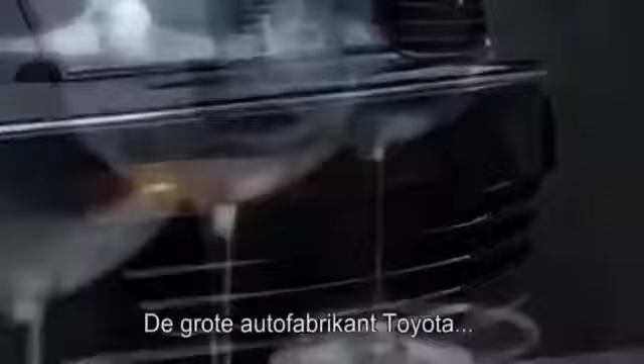Lexus is just over 20 years old. The world's largest car maker, Toyota, created the brand to compete with other high-flying luxury marques, Mercedes-Benz, BMW, and Jaguar. It's worked. Lexus is now one of the biggest-selling high-end marques in the United States. But now, Lexus is out to inject more excitement into their brand. Chief Engineer Tanahashi Haruhiko is the man behind this vision.

The LFA has a passion, an emotion that isn't in earlier Lexus cars. We wanted to move the brand in that direction. That's how we made this car. Tanahashi believes the marque can mean more than just luxury. I wanted to make a new sports car, one that could stand against the long-established European so-called supercars, Porsche, Ferrari, and Lamborghini, to show that we Japanese could make something like that.

It's a risk. The company hasn't made anything like this before. Their reputation depends on its success. Chief Engineer Tanahashi is stepping into the unknown. He must build a car, a team, and a factory from scratch. Basically, we proceeded at my discretion. And where there weren't any rails, I laid them down.

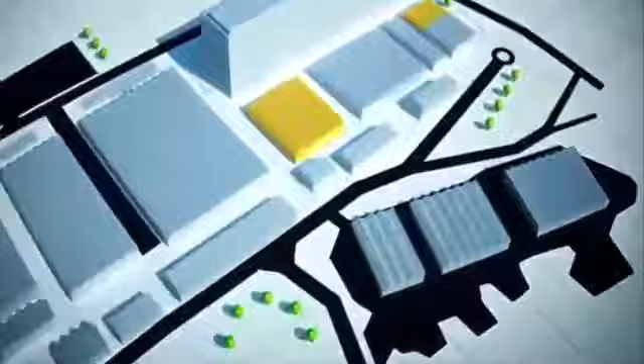Finding a factory in Japan isn't hard when you're part of the country's largest company. Toyota is so big, they even have their own city, Toyota City. Of the company's 15 Japanese factories, 10 are found in the city or close by. Among them, the Motomachi assembly plant. The company transformed two unassuming blocks of this megafactory to create the LFA. They then scoured Toyota's 50,000 Japanese workforce to handpick just 175.

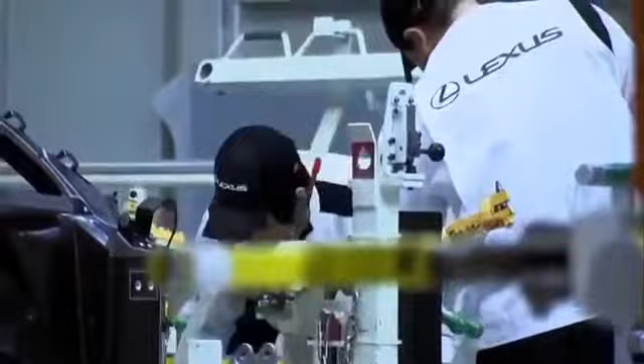All the associates here at the LFA Works feel they are artisans, not just operators. These artisans are known as takumi, Japanese for craftsmen, a status only conferred on the most highly trained, skilled workers. Each and every associate at the LFA Works is seeking to achieve perfection, taking this challenge on with a sort of samurai spirit.

Yamanaka Shigeru is manager of the LFA Works. His teamwork credentials come from another time-honored Japanese tradition, baseball. Before this, I was working as manager of the Toyota Motor Corporation baseball team, which brought people together from lots of different... It was because I could manage that organization that I was made manager here.

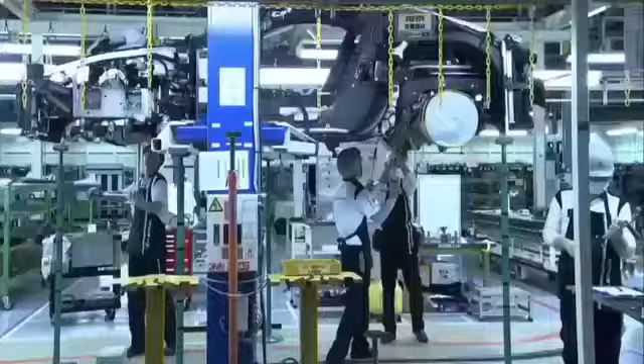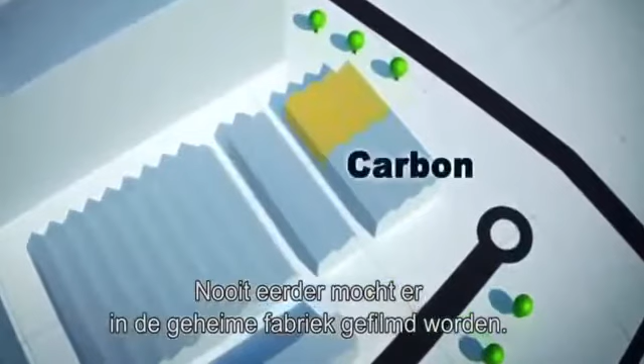To reach their goal, the tight-knit team utilize sophisticated tools and materials to build the car. The most important of these is carbon fiber composite. Carbon is crucial to the car's performance. It's a material 5 times the strength of steel, yet a quarter the weight. It's the construction material of choice for both Formula One racing cars and the aerospace industry. The company even make their own carbon fiber here on site. Up until now, no television cameras have ever been allowed inside this top-secret facility.

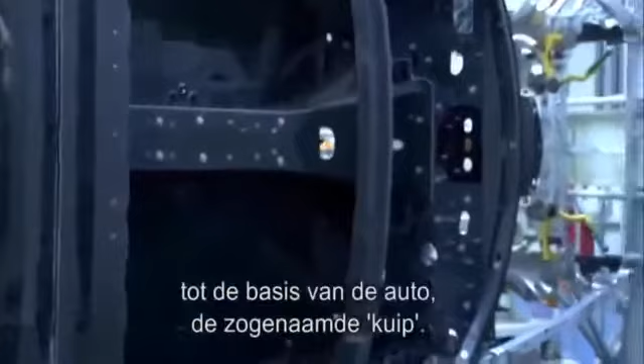First, simple strands of carbon fiber are woven into a pliable cloth using an automated weaving machine. This fabric is then transformed through heat, pressure, polycarbonate resin, and labor-intensive techniques into the car's core known as the tub. The tub is pieced together like a 3D jigsaw. It starts with the construction of the floor. To make it, precisely cut carbon fiber cloth is lifted onto a mold. Next, skilled takumi smooth the supple fabric over the mold. This one is for the transmission tunnel that will house the drive shaft and exhaust.

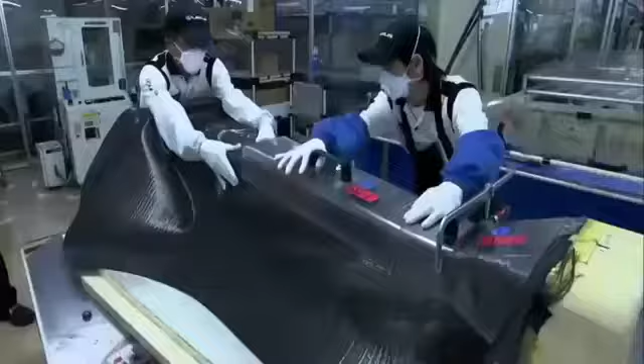In very complex areas like this, the fabric inevitably becomes frayed and not very neat. The associates work with these areas as if working with silk, taking great care every day. They also wear masks to avoid breathing in the hazardous fibers. In the beginning, the associates found it very difficult to work this material. It was much easier when they used an iron.

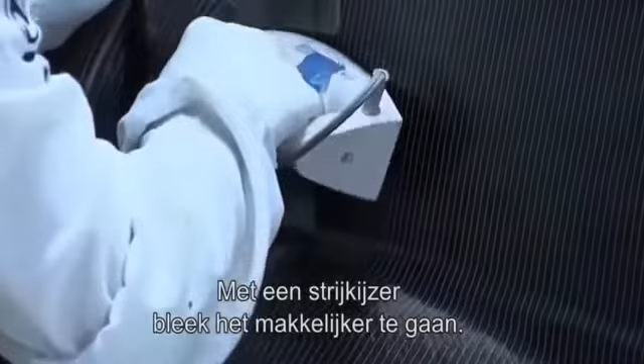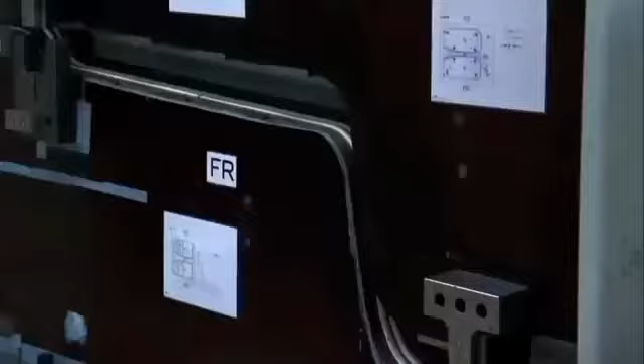The completed part is iron heated to set its shape. It's then fitted into a template, along with 7 other floor parts, and inserted into a 1,000-ton press. A glue-like resin is pumped into the template, and the whole section is then baked for 8 hours at 130 degrees Celsius. Under this pressure and heat, the resin sets hard, binding the individual parts together to produce the car's floor panel.

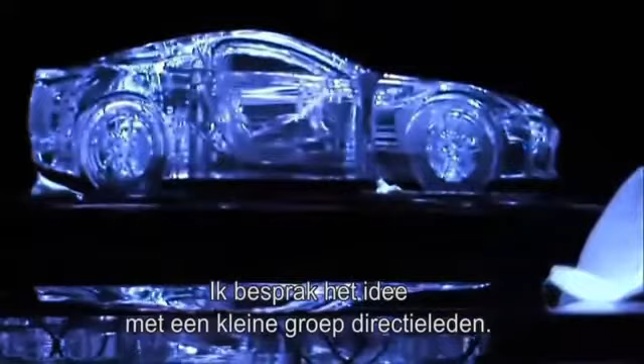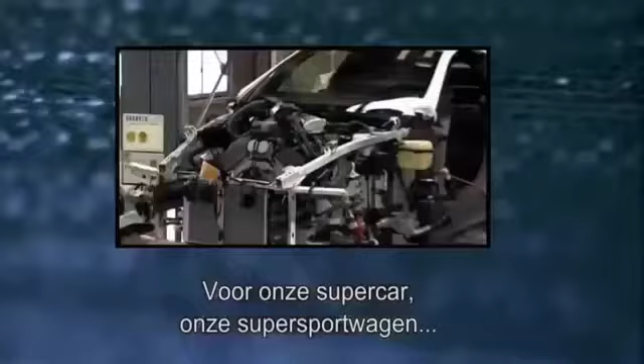Back in 2000, the concept of a world-beating supercar only exists in one man's head. At the company, I talked to just a small group of people at the top, not expecting anything, and they said, go ahead and try. With permission to proceed, Tanahashi gathers a team of engineers around him, and they start to make the basic engineering decisions. In the beginning, we planned to make the body from aluminium. But Tanahashi is fascinated with the possibilities offered by carbon. Developing a supercar, a super sports car, carbon fiber was a material I really wanted to try using, if at all possible.

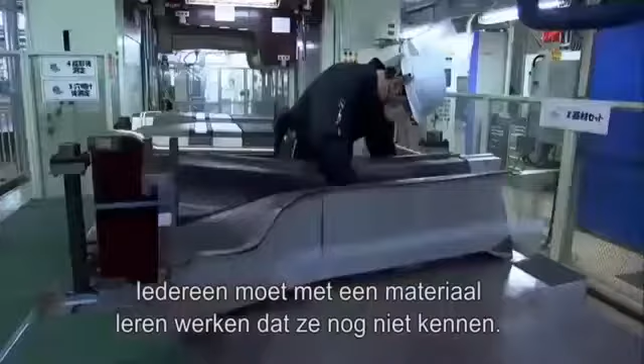But this wonder material has its drawbacks. It's expensive, and the company has never used it to build any of their cars before. Despite these significant challenges, Tanahashi gets his way. In 2005, my boss said, why not go for carbon? Slapping me on the shoulder. And I made the decision to go for carbon then. It's a bold step. Everyone involved with this project must master a material they have no experience with at all. It was the first time the workers had touched carbon, and everything about it was difficult for the workers.

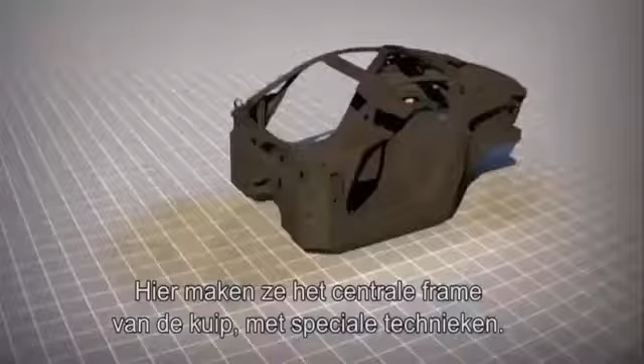In the state-of-the-art carbon fiber facility, the Takumi are returning from lunch. They vacuum themselves down to remove any foreign particles before entering a highly confidential sealed room. Here, the majority of the tub's central frame is created using the most intricate techniques. In this process, an automated laser cuts out hundreds of individual shapes from carbon fiber cloth that's been pre-impregnated with a sticky resin.

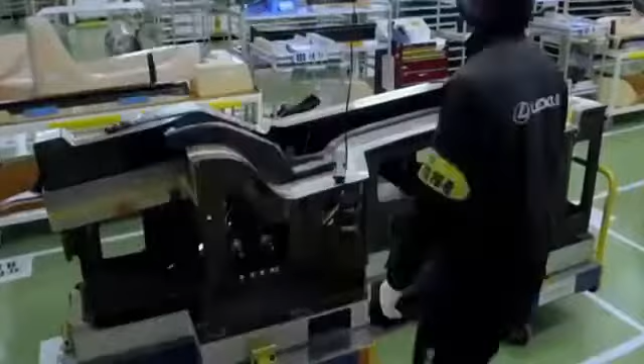Next, Takumi layer the cutouts, up to 20 sheets deep, onto a mold. This one will make the right side panel. The associate uses a dryer to raise the temperature of the laminate and half melts the resin as he applies it. The tacky cutouts stick to each other and any gaps are squeezed out using a vacuum bag that forces them together.

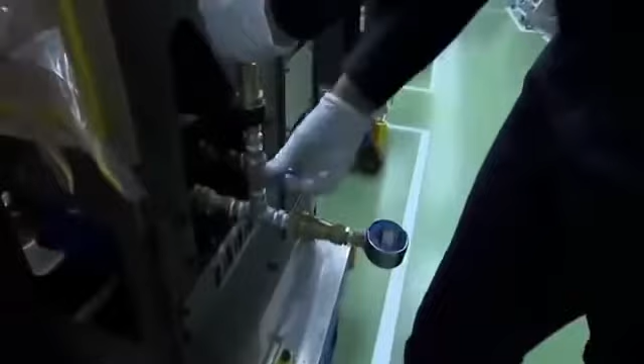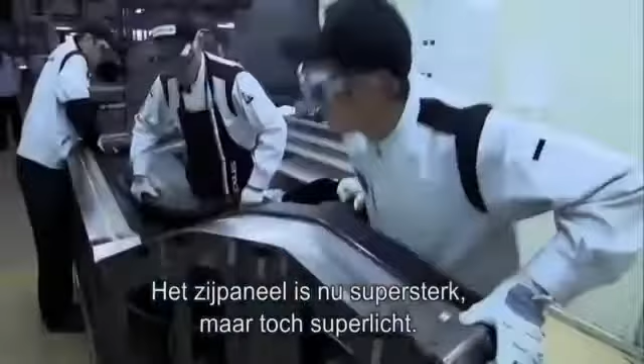The shrink-wrapped side panel is then wheeled across the works and loaded into a pressurized oven. Baking overnight at 150 degrees Celsius sets the resin, resulting in a side panel that's both ultra-strong and ultra-light. An aluminium equivalent would be twice as heavy. Weight saving is the holy grail for all auto engineers.

Less weight and more power leads to increased acceleration, and speed defines a supercar. The body of the LFA is 65% carbon fiber, helping it accelerate from 0 to 100 kilometers per hour in 3.7 seconds. If made of aluminium, it would be 100 kilograms heavier, like having a sumo wrestler in the passenger seat. As it is, this car weighs just 1,400 kilograms all in.

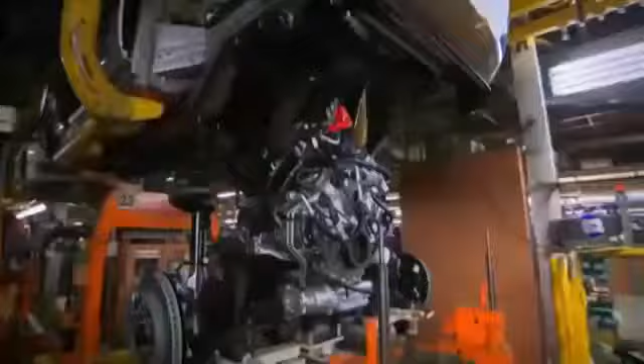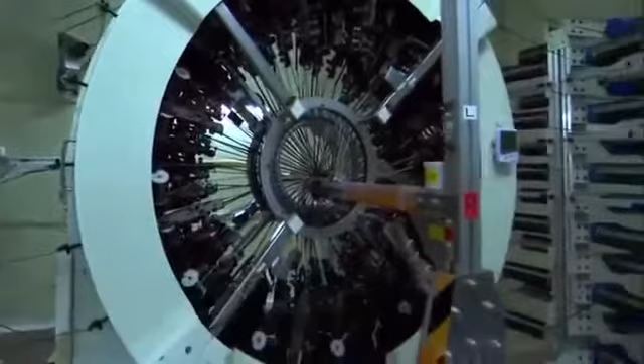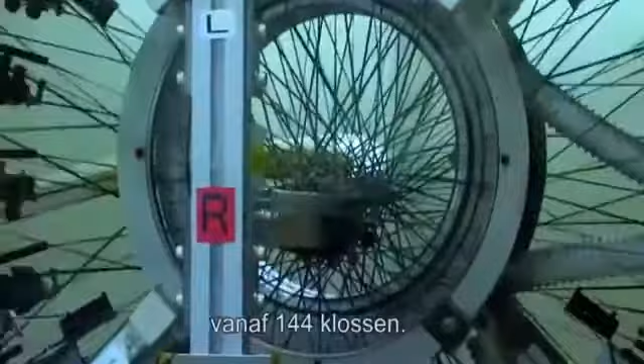Back at the factory, in a locked room, a bespoke machine creates two crucial parts to complete the tub's construction. The roof rails support the windscreen, as well as protecting the driver if the car rolls over. This custom-built circular loom weaves the carbon rail in 3D. It uses lasers to control the feed of carbon fiber strands from 144 bobbins.

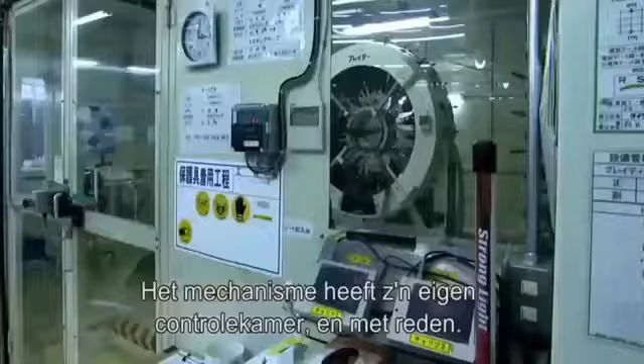These knit the carbon around a top-secret automated template that's fed through the center of the loom. This is done twice over to cross-hatch the carbon weave, so giving the rail its strength. The whole mechanism has its own control room, and for good reason. If something goes wrong, even a little thing, the shape gets distorted immediately, so the operator constantly pays attention to avoid this.

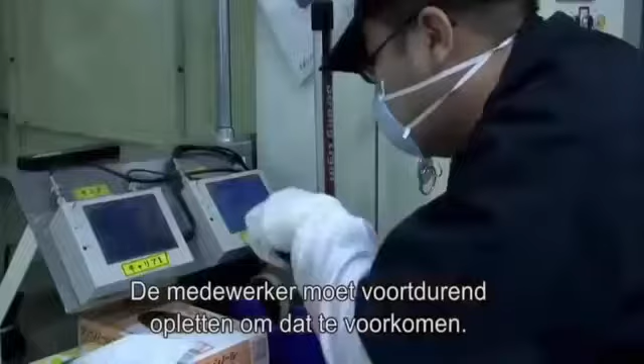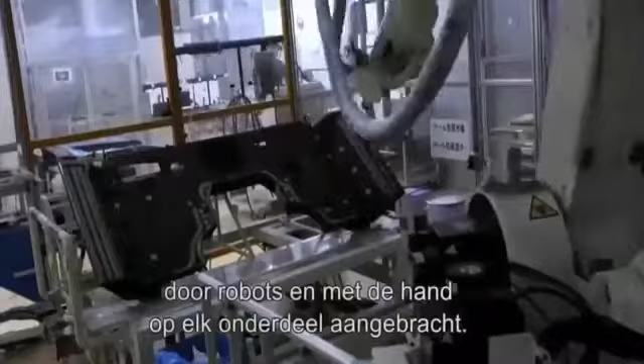The roof rail is heated and impregnated with more resin to complete its metamorphosis from a flexible tube to a rock-hard rail. You may think that this is quite heavy, but it is only 2 kilograms. The tub is bonded in another top-secret jig. First, a super-strong adhesive, known as epoxy resin, is applied by robot and hand to each of the parts. The separate parts are transferred to the jig and locked in place. Pop rivets keep the pieces aligned.

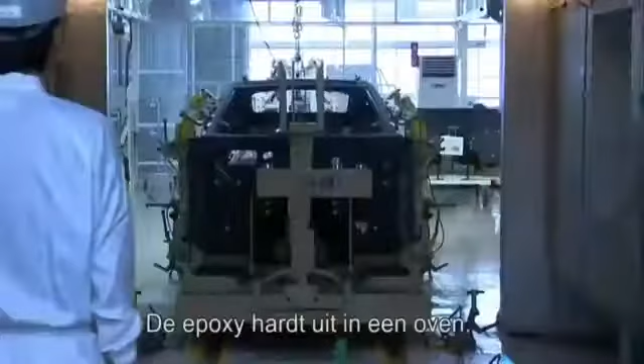To cure the epoxy, the jig is pushed into an oven and then baked for 60 minutes at 60 degrees Celsius. The resulting tub is so strong, it acts as both the structural core of the car and as a crush-resistant safety cell, should the car crash.

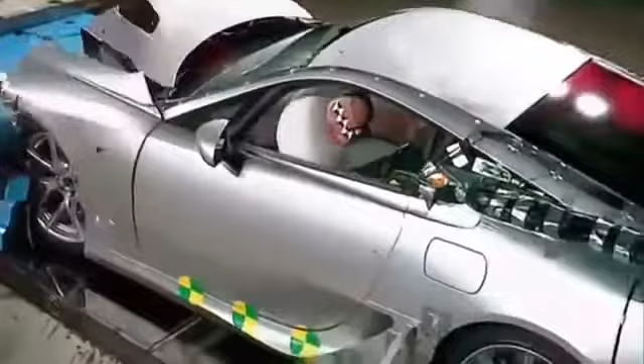The challenge now is for Matsumoto Kengo, chief designer of the LFA, to create a car with a body as technical as it is elegant. For us, aerodynamics, heat and airflow management should be tangible in the design. A conventional car cools its engine with forward-mounted radiators that suck cold air through a front grille. Not the LFA. Front space is at a premium, so coolant is pumped from the hot engine to twin radiators mounted behind the car's rear wheels.

Matsumoto had to shape the car to funnel cold air to these vital components. Airflow management is optimally controlled by setting the angle between the door mirror and the cabin. It goes past the cabin and smoothly into the air intake for the rear radiator. This shape is not just for styling. The intake is deliberately formed here, from the base of the glass. The result is an airflow system capable of cooling the engine even under the most extreme race conditions.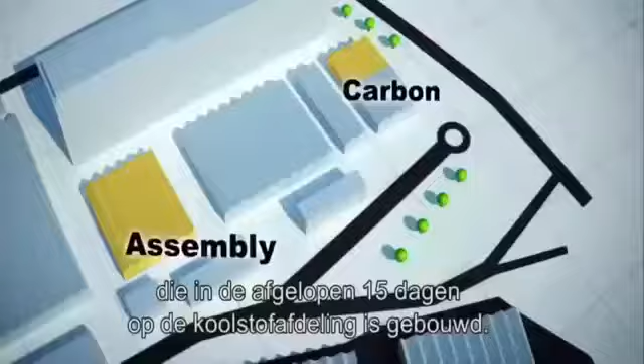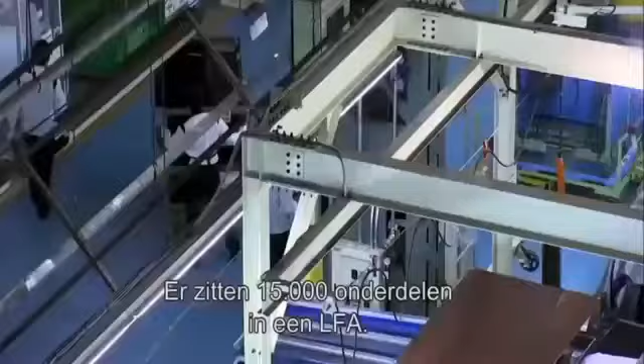It's 8:45 in the morning at the LFA works. The Takumi are warming up for an 8-hour shift ahead. Their first task is to greet the bare cabin as it arrives from its 15-day build in carbon round the corner. In assembly, the cabin will progress through 4 positions: trim, chassis, final, and alignment. 15,000 parts go into making an LFA. The first of these are attached here in trim.

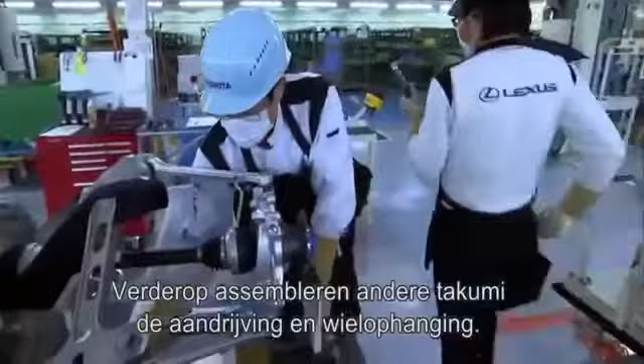Just meters away, other Takumi assemble the drivetrain and suspension. The drivetrain comprises the transmission, torque tube, and last but not least, a 4.8-litre V10. The location of this engine is crucial to the car's entire concept. I wanted to build the car around the people in it. And for a supercar that puts people first, the optimum place for the engine is front mid.

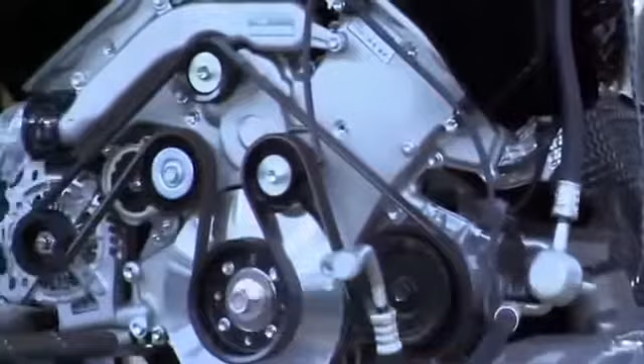This front mid location puts the engine between the driver and the car's front wheels. With the transmission placed at the rear, the driver is in the center and the car feels balanced to drive. The aim is to make the car's handling as good as possible. But a front mid configuration dramatically restricts the space available for the engine. Tanahashi has a problem.

You need an engine of a certain size with a certain degree of compactness, but you want a high-powered engine as well. Tanahashi needs a small engine to fit in the restricted engine space, but he also needs the power of a large engine because power equals speed. And that isn't all. The high-pitched sound of Formula One makes you shiver, doesn't it? I really wanted to have that as part of the LFA.

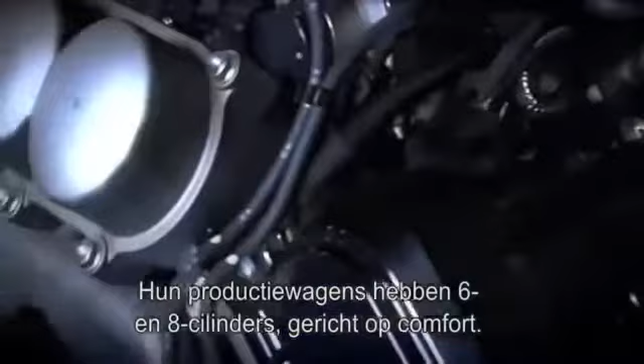Only a high-revving V10 engine supplies this combination of power and sound, but a traditional V10 is too big for his mid-front configuration. Lexus have made nothing like this before. Their production line cars use 6- and 8-cylinder engines engineered for a super quiet ride. This V10 will be the opposite. Tanahashi turns to some old friends for help.

We are a motorcycle manufacturer. We understand power alone is not enough in a vehicle. For a sports car, small and lightweight is critical. For almost half a century, Yamaha have worked with Toyota to create high-powered, lightweight engines and cars. The legendary 2000 GT, star of the James Bond film You Only Live Twice, and Japan's first true sports car, was the first fruit of their collaboration.

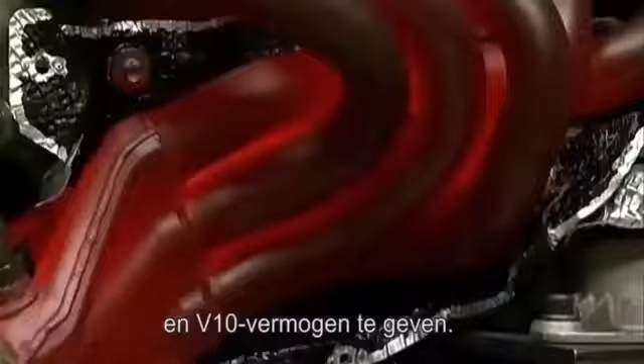Headed by Lexus engine guru Okamoto Takamitsu, the team sets itself an ambitious goal: to create a naturally aspirated V10 engine as compact as a traditional Lexus V8 with the weight of a V6. I wanted to create something different to any other supercar engine. Normally, engineers use turbochargers to boost the output of smaller engines to simulate V10 power. But turbocharged engines don't have the rapid response, acceleration or sound of a naturally aspirated V10.

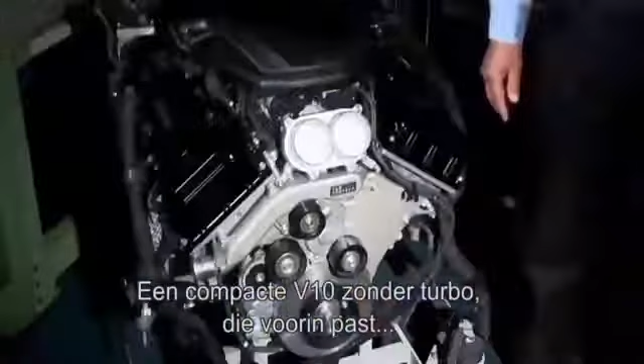By using Yamaha's motorcycle know-how, the lightest metals, and redesigning the engine's guts, Okamoto creates a masterpiece of engineering. A non-turbocharged compact V10 that fits into a mid-front design while keeping weight to a minimum. The engine starts life in Toyota's Miyoshi plant as molten aluminium.

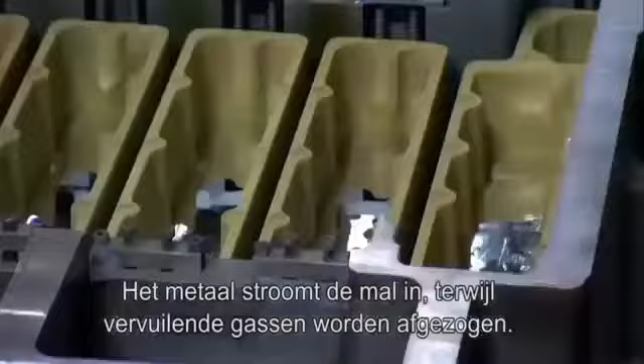It's cast in a 3D resin-impregnated sand mold made from 37 individual blocks that take a week to fashion. With the blocks fitted together, the mold is ready to be filled. At 750 degrees Celsius, impurities are scooped off the top of the molten aluminium. The liquid metal flows into the mold as a vacuum sucks out any contaminating gases. Two hours later, with the metal set, the sand is hammered off to reveal the solid aluminium engine block inside.

It's off to Toyota City's Honsha factory and the company's highly confidential Formula One engine facility. These works are always off limits. We're going to go in. Are you ready? Come in. Television cameras have never been allowed in here before.

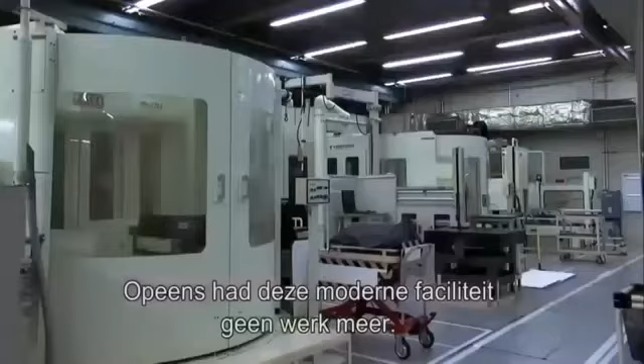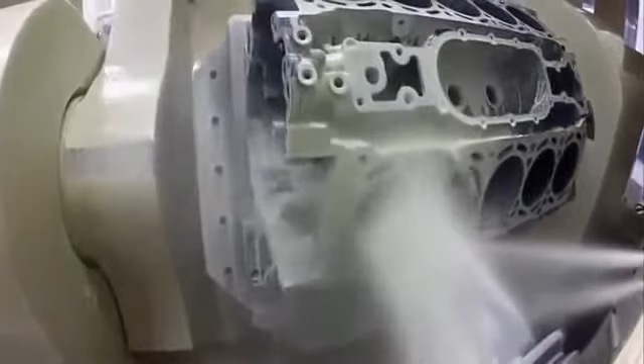For a decade, Toyota spent big competing in Formula One racing. But without a win in 139 races, they withdrew in 2009, leaving this state-of-the-art facility idle. For the LFA team, it was too good an opportunity to miss. The close parallels with F1 engine technology make this milling facility a ready-made fit. In these million-dollar automated machining tools, the rough engine casts are milled, drilled and polished before emerging.

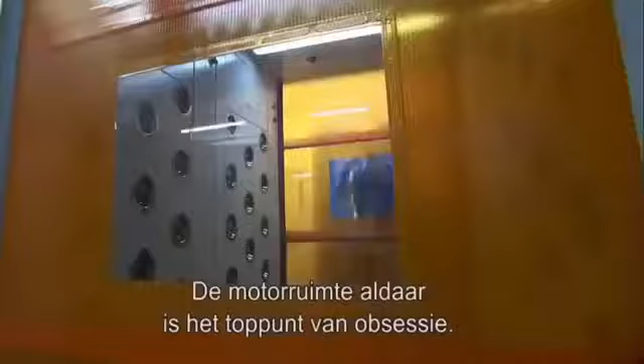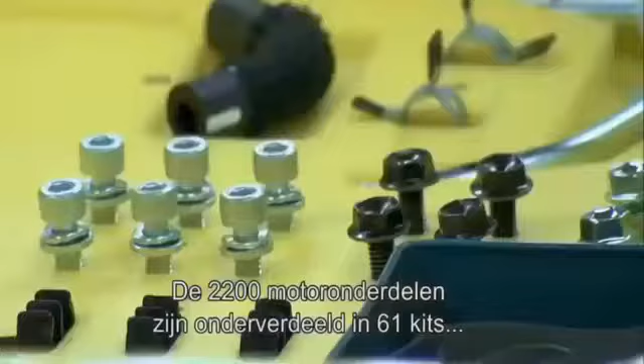Japanese marque Lexus sells itself on luxury, marketing its cars as elegant, quiet, high-tech, and efficient. Now, a different kind of car wears the Lexus badge, the LFA. Aggressive, loud, agile. Highest revving V10 engine in a production car. 325 kilometers per hour. A car like nothing Lexus has ever produced before.

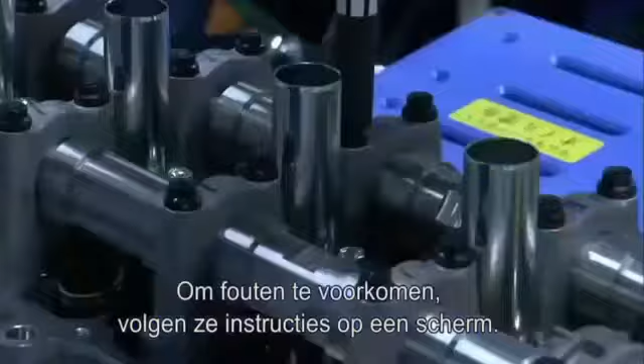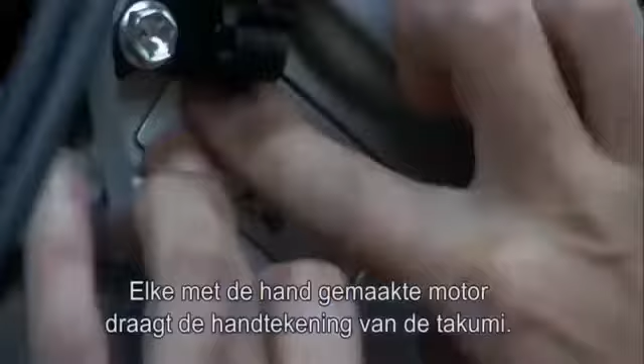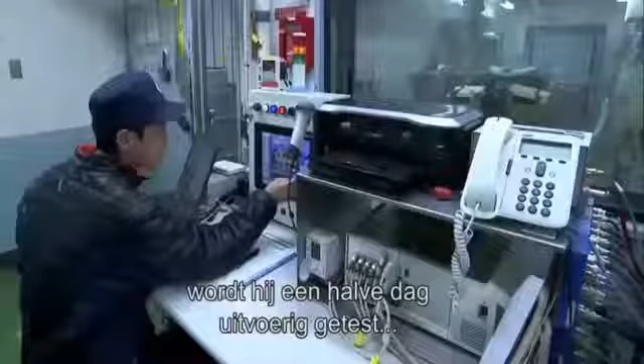Lexus is just over 20 years old. The world's largest car maker, Toyota, created the brand to compete with other high-flying luxury marques, Mercedes-Benz, BMW, and Jaguar. It's worked. Lexus is now one of the biggest-selling high-end marques in the United States. But now, Lexus is out to inject more excitement into their brand. Chief Engineer Tanahashi Haruhiko is the man behind this vision.

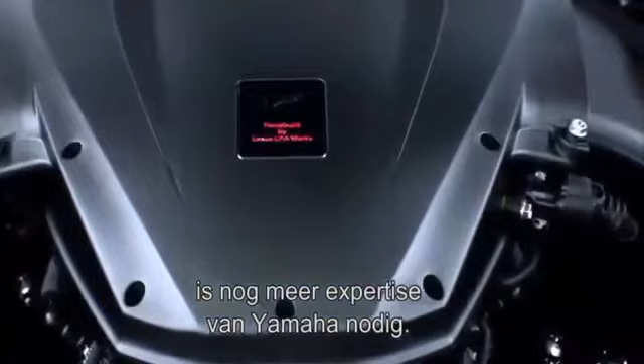We are a manufacturer of musical instruments, so when it comes to sound technology, we have a certain level of know-how. Honji Yoshikazu is obsessed with sound. I think the relationship between a super sports car and its driver is like the relationship between a top musical performer and their instrument. When they play in a certain way, they can listen to that sound and use it to produce another, better sound.

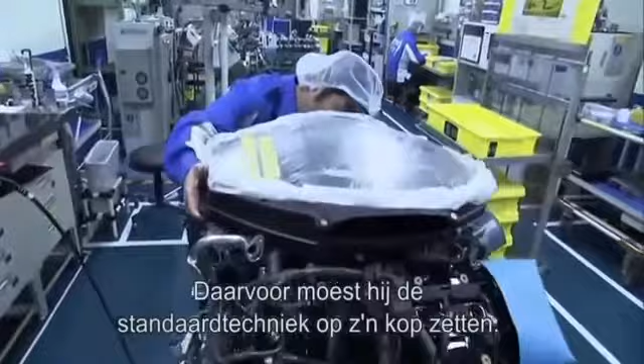Critically, a car has two different sound characteristics. One sound is the exhaust. You can call it an iconic sound. Just by hearing that sound, you know which car it is. The other, which we were particularly concerned with, is the sound heard by the driver. To refine the driver's soundtrack, Heiji Maruyama, general manager of Yamaha Motors, had to redesign the component that sits on top of the engine, called the surge tank, by turning convention on its head.

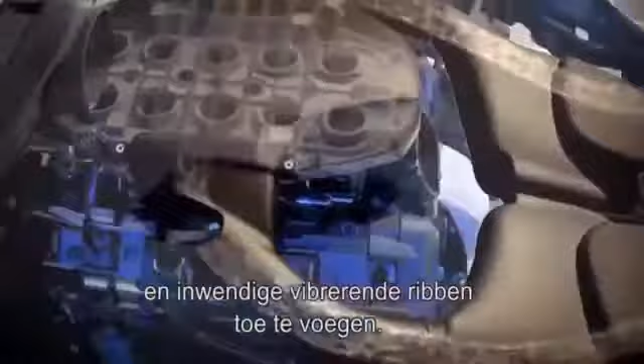The function of the surge tank is to send air equally into all 10 cylinders. Normally, techniques to reduce noise from the intakes are used. We thought to go the other way and use it to amplify the sound, to communicate it to the driver. Maruyama tunes the chamber by varying the thickness of the surge tank's upper surface and adding internal vibrating ribs. The construction is very like that of an acoustic guitar or violin.

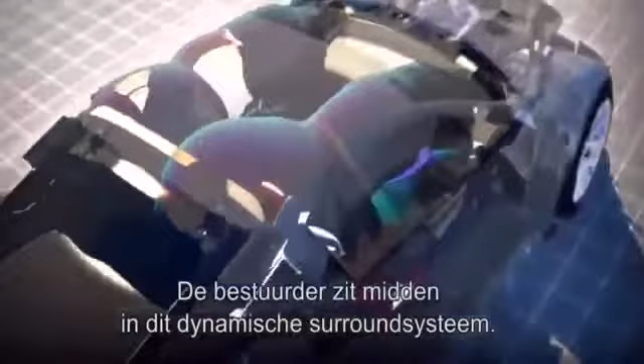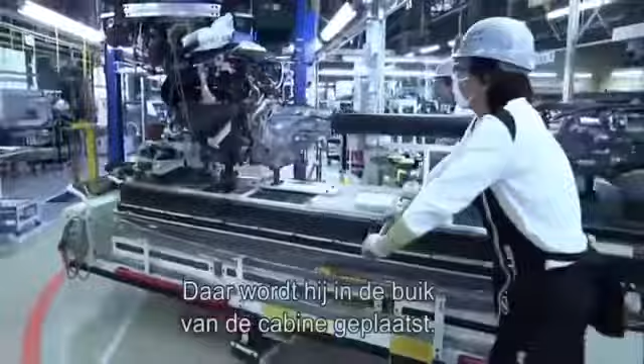The team channeled these good vibrations back into the cabin using sound passages. We use these to send low-pitch sound to the driver's feet and higher frequency sounds through at ear level. The driver is in the middle of this dynamic surround sound system. The completed engine is forklifted onto a waiting truck for shipment back to the LFA works. Here, as part of the assembled drivetrain, it's inserted into the cabin's belly, guided only by eye.

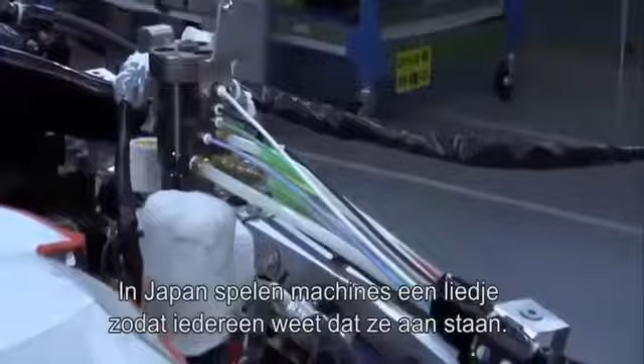With the guts of the car in place, it's time to feed them. An automated pump injects engine oil, brake fluid and coolant into the appropriate underbonnet opening. In Japan, machines play a tune to alert anybody nearby that they're running. This one plays an American folk song. With the precise volume of fluid added, the pump stops, as does the music.

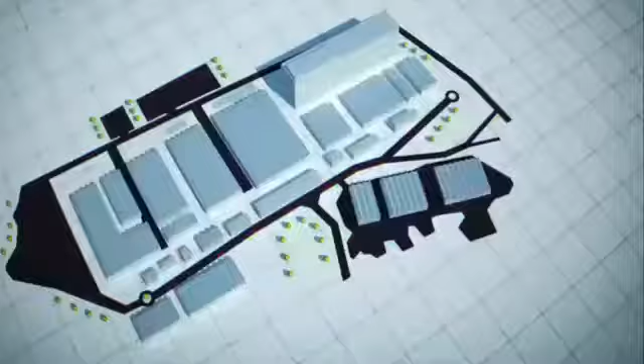The car's 9 moulded glass fibre body panels are manufactured off-site. This material is both strong and light, but far cheaper to replace than carbon fibre, should the car crash. The paint shop is under the same roof as assembly, but it's a very different world in here. At the LFA works, paint is one of the few production processes performed by robot. The company believes they give a more consistent finish.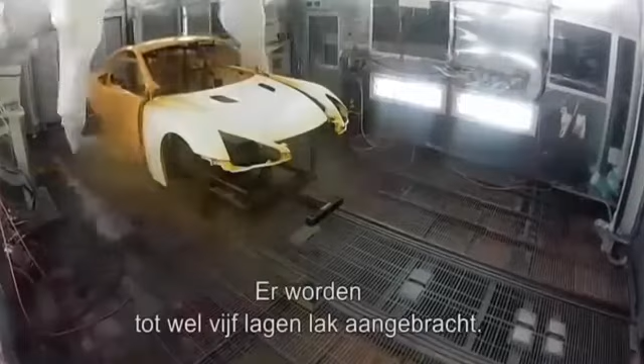But there's always an ongoing human battle in the paint department. Dust is the greatest enemy for painting. If dust gets into the paint surface, when it's heated, the dust swells up and causes a blister. So the atmosphere is controlled on a daily basis, and there's a strict dress code. Up to 5 layers of paint are applied. And where robots can't reach, humans can.

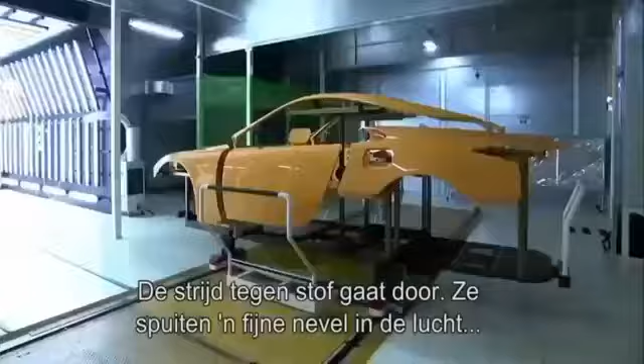Job done. The sprayed panels are dried in an oven at 100 degrees Celsius for 50 minutes before being wheeled out for inspection. The battle against dust continues, with water nozzles spraying a fine mist into the air to stop anything drifting onto the pristine surfaces. A bright light inspector spots any blemishes and marks them up to be polished out.

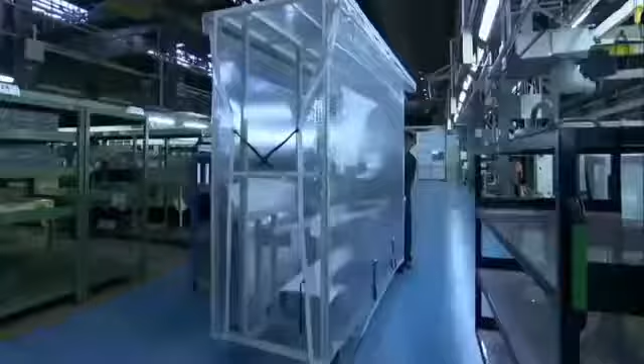The completed panels are wheeled out of paint across the factory floor and attached to the carbon tub back in assembly at the 3rd position on the line, known as final. Here, the hand-stitched leather interior is installed, and the forged aluminium wheels with bespoke Bridgestone tyres are also fitted. It looks as if the associates are performing each task very slowly, but every one of them is working very carefully and with a high degree of certainty. If you compare it to a sport, they are top players who complete a successful play every time.

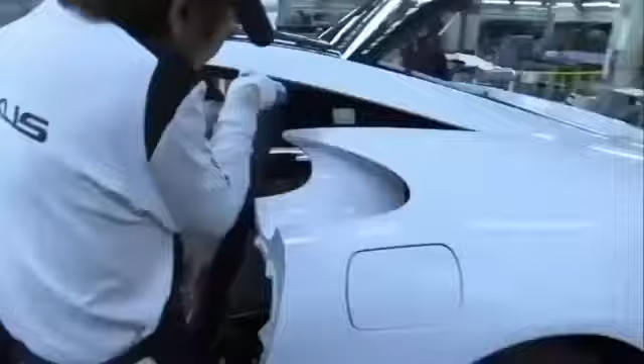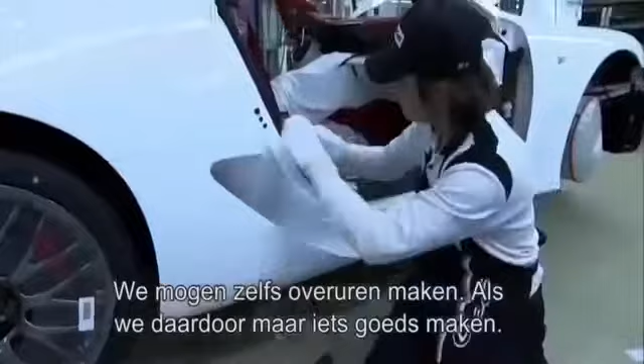The LFA works runs like clockwork, yet there's no clock watching. The reason why there is so much time is that Chief Yamanaka tells us to take our time and work slowly so that we can make something that we know is good. How can I put it? He says that in order to ensure quality, we can take as much time as we need. That goes for overtime as well. If it means we make something good, then we can do overtime.

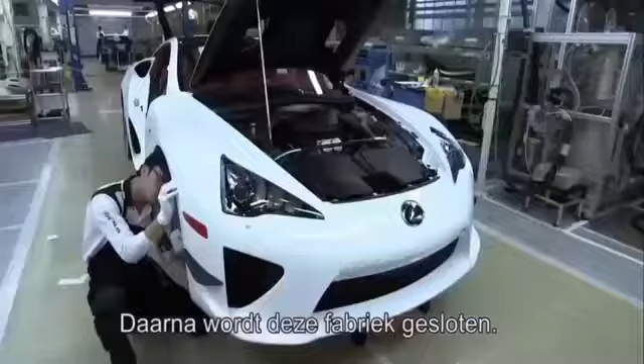The only stipulation is that one car must drive off this assembly line every day. And from the beginning, Chief Engineer Tanahashi was clear that only 500 would be built. At a car a day, that will take just 2 years. And then, this factory will close. Making only 500 cars positions the LFA as a very special car. There is no plan to make any more at all.

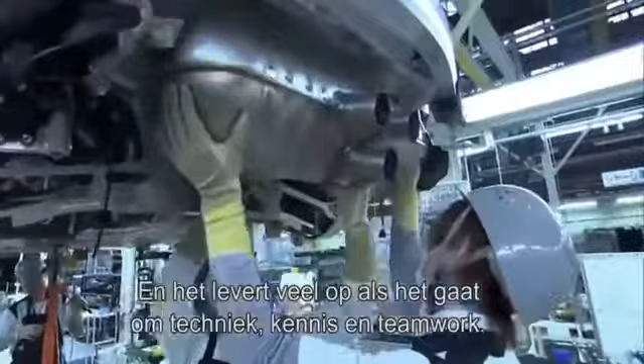Even pricing the LFA at $375,000, the most expensive Japanese road car ever, a limited production run isn't going to recoup the costs of development, the use of cutting-edge materials, and unlimited overtime. I think it will be difficult to make a profit with only 500 units delivered. But by producing the LFA, the Lexus brand gains in value and is well received worldwide. I think the legacy will be left in technique, knowledge and teamwork for making cars that will please our customers in the future.

Back in 2004, with the prototype built, Chief Engineer Tanahashi takes a bold decision. He wants the car proved on the severest of tracks. Nothing in Japan fits the bill. So he takes the entire development team to the notorious Nürburgring in Germany. For us car makers, the Nordschleife on the Nürburgring is like a mecca for cars. This is where this car was honed.

The 20-kilometer Nordschleife section of the Nürburgring is infamous as the world's most punishing test track. For 4 years, the team tests every aspect of the car's engineering around the Nordschleife's dips, jumps, relentless corners, and flat-out straights. The car's development makes progress towards its production deadline, but Tanahashi wants to fast-track its fine-tuning.

In 2008, he throws it into the unforgiving world of racing and enters the Nürburgring 24-hour race. It was purely to get more feedback on the production type LFA and to improve it under real race conditions. The brutal experiment works. A year later, the revised car wins its class. Tanahashi is finally happy, and in 2010, the LFA goes into full production.

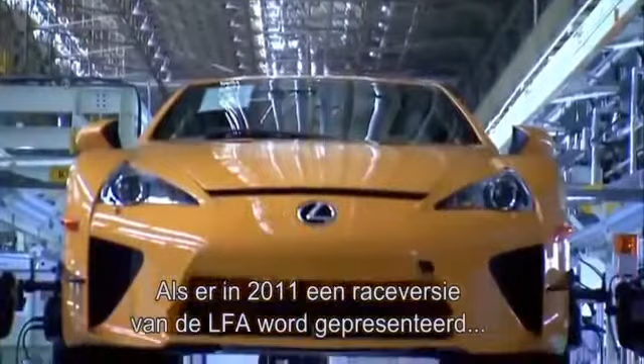And when in 2011, a special race edition of the standard LFA is launched, its name pays homage to the racetrack that forged it. It is with thanks to that sacred place that we called it the Nürburgring package. This Nürburgring package has a retuned engine which pumps out 571 horsepower, 11 more than the standard engine.

This extra power requires more downforce to keep the car on the track, so the rear spoiler is larger and fixed. And left and right canard fins on the car's front bumper also increase downforce. The stiffer lower suspension makes it more suitable for a life on the track. Finally, to increase acceleration, the computerized transmission is upgraded to change a split-second faster. It all adds up to a Japanese supercar. Only 50 will be built, each with a price tag $70,000 more than a standard LFA.

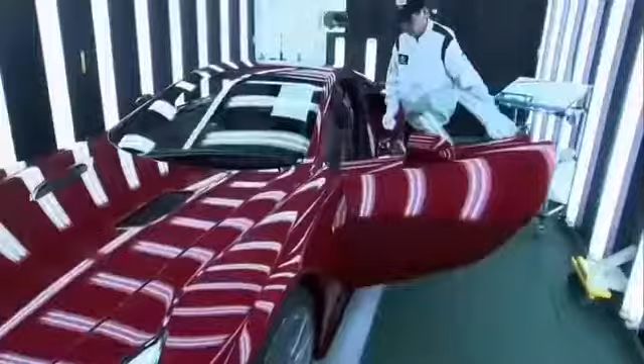Back at the LFA works, in assembly's last position, the wheels are aligned to ensure the car handles perfectly. After 3 days in assembly, the car officially moves to inspection. The inspection process involves 7,000 separate checks. Hayashi Katsumi does the first of 1,482 of these under lights.

Right now, I'm inspecting the paint surface. I'm using my hands to feel for any uneven areas in the bodywork. You have to touch it gently, like I'd touch a woman. I've been doing this job for 30 years. If I didn't have my wife, then it would certainly be my lover.

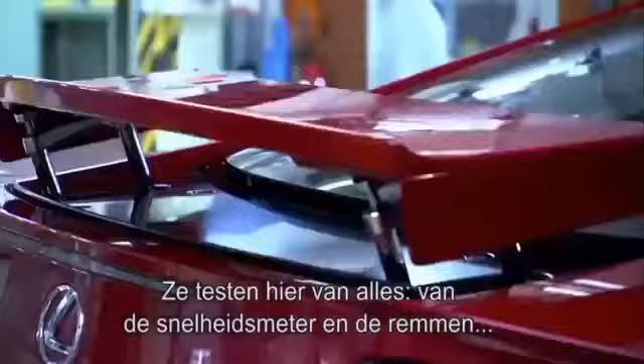With the internal and external surface inspection signed off, the car leaves the LFA works for good. It's driven through the Motomachi plant into quality control. This will be its home for the next 7 days. The checks performed here range from speedometer and brake tests to water tightness. The reports fill a 350-page booklet.

Finally, test driver Amano Nobuaki ensures each of these cars is road ready when it leaves the factory. The car is bedded in on Motomachi's very own test track. The masked sections of the bodywork are to protect vulnerable areas from stone chips. I think this is the best possible job in the world. Amano checks the car's controllability, engine sound, power, braking performance, and vibration noise on the 1 kilometer track.

There is one danger driving this car every day. Every now and again, I just want to forget the job and drive this car away somewhere to have for myself. This car is complete and ready for its owner. To date, all 500 LFAs are spoken for. No more will be sold.

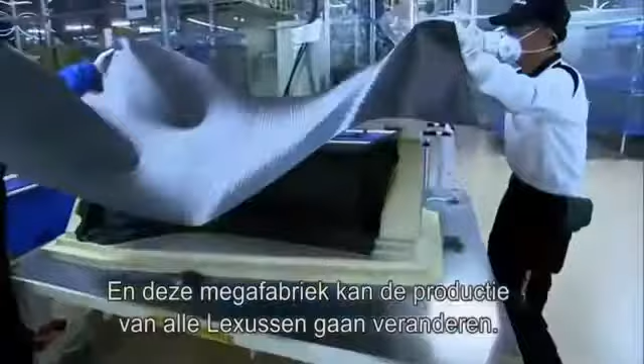This car could redefine what Lexus means to the world. We developed the LFA with a new direction, one of emotion, passion and power. This was new to Lexus. And this mega factory could redefine how all Lexus cars are built. We took on all kinds of challenges, and there were new production needs. I look forward to seeing the outcome of these, both visible and invisible, in future cars.